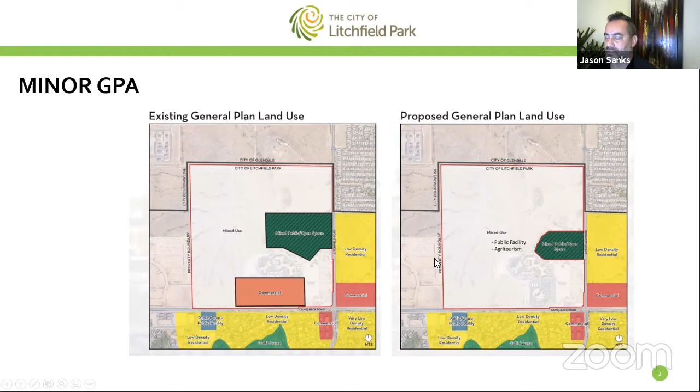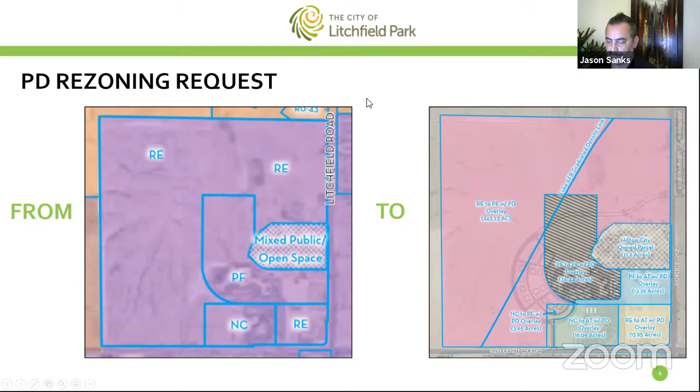So the exercise the mayor requested for the council study session in February was, okay, we see this development booklet, we see all the pictures, we get it, you're telling a story, but what is it that you actually are asking for? What would ultimately be in a rezoning ordinance when you have to put it in black and white, and what are the units? We're concerned about density. We believe density is going up, but can you tell us exactly, Jason, what it's going up to? So what we were able to do is break it down into a from and to.

You really could get up to about 770 units. That's what they have by right to develop, so long as it's done within the deed restrictions on the property, if that's the correct term in regards to the Denny Trust.

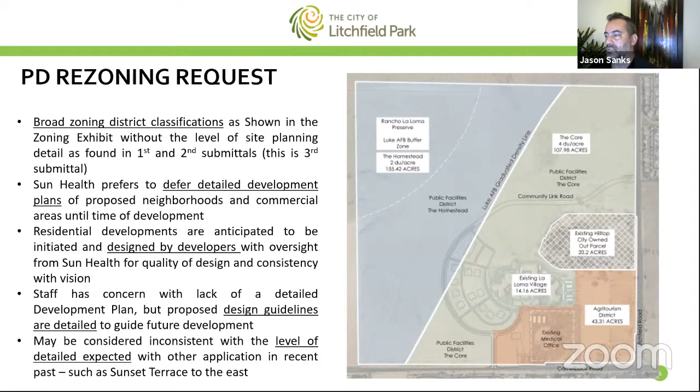So while it's inconsistent with the level of detail that's been generally expected of projects in the past, those same projects did not in turn provide the level of detail and design guidelines that Sun Health is committing to in their development plan booklet.

They have provided a graduated density and phasing exhibit. One of the issues they've encountered in bringing this project to fruition is how Luke Air Force Base and its operations, particularly concerns about residential densities and noise contours, will impact development.

So they've spent time working with Luke Air Force Base and developed this graduated density and phasing exhibit. You can see the blue section of the project with this almost arbitrarily drawn line. It's not a planning line, and it doesn't represent true phase boundaries, but rather the area where they're allowed up to 2 dwelling units per acre.

This is based on proximity to the noisy parts of Luke Air Force Base operations. So if you're wondering why this line is dashed across the large property, it represents the area restricted to 2 dwelling units per acre. Outside of that, they're proposing 4 dwelling units per acre further from the blast zone and other noise contours.

The applicant met directly with Luke Air Force Base. City staff was not, I believe, at those meetings, so I don't have further details, but they've said they have Luke's blessing regarding numbers of units, types of development, and density relative to proximity to the base. That's the first purpose of this exhibit.

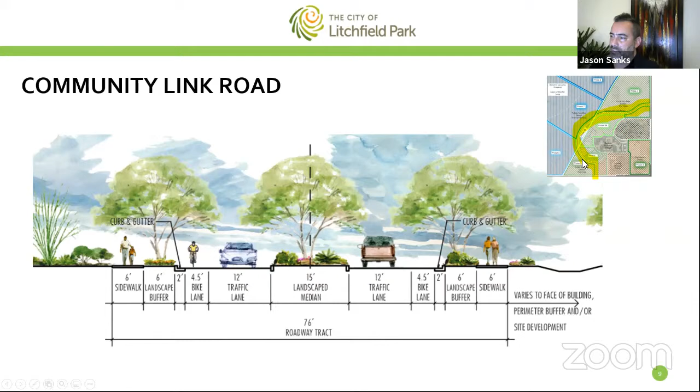Wraps the whole campus, and then extends to the... there we go. Extends to the east and then connects over to Litchfield. So that will be the spine for the whole development.

So all of the communities that are in the future to be built in and around the core, which is in the middle where the existing village is, and then the Homestead, which wraps to the northwest and then kind of to the southwest, all of those individual projects will tie into this Community Link Road, and it will be the community collector.

So the types of details they've included in the booklet that you've probably reviewed is how would we build this out, how would it be an attractive community, and what are we committed to in terms of quality and design, while at the same time meeting the infrastructure needs of the project? So these are things that Woody's been looking at.

As we progress closer to hearing dates, he'll have certainly a host of recommended conditions or stipulations that would tie them to specific improvements to the property. But I did want to show you this - this is the primary road. Within the booklet, they also show what the neighborhood streets would look like throughout the development as developers come in.

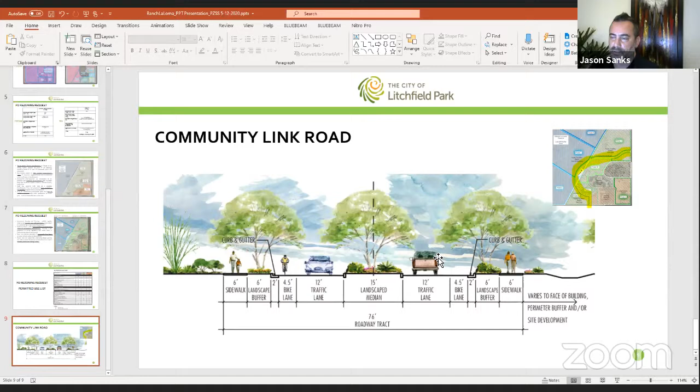So those are all of the slides I have. Again, I tried to keep focus off more of the illustrative, photographic type exhibits in the booklet, and just stick with the black and white stuff.

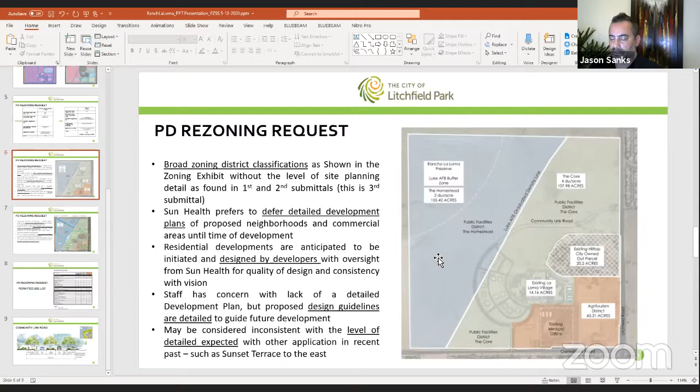It is a large rezoning case, it's a lot to digest. The big thing to remember is for them to really develop this property in the way that they want to, it does require rezoning. They are requesting an increase in density. In return for all of that, they're providing you the vision of how they believe the campus will build out, and they're committed to a significant set of design criteria to guide that future development, even though they don't have the details of that future development at this time. So that's what they're asking you to support.

With that, I'd be happy to answer questions. And then when the applicant representative is ready, I can turn the controls over to, I believe, Carolyn, and she'll present to you her version of the slideshow. Does anyone have any questions for Mr. Sanks?

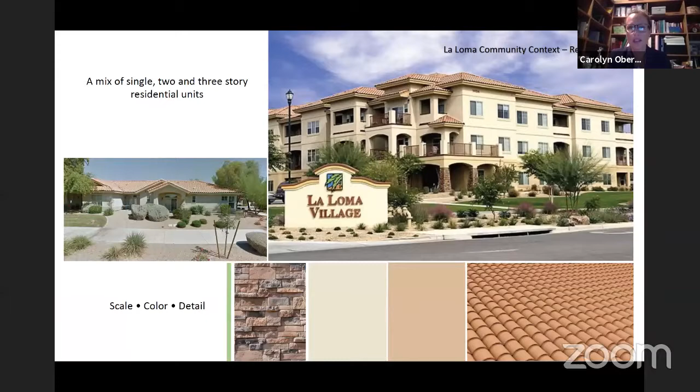We also have the medical office building, the MOB as we call it on exhibits, and that is 100% occupied right now with medical professionals that serve the larger Litchfield Park community. So that's not specific to La Loma.

I should also mention that on the La Loma campus up in the village, last year they had just short of 350 non-La Loma rehabilitation residents. So if you have a short-term rehabilitation you need to do from a knee surgery or a hip replacement, that can happen on the La Loma campus, and does frequently.

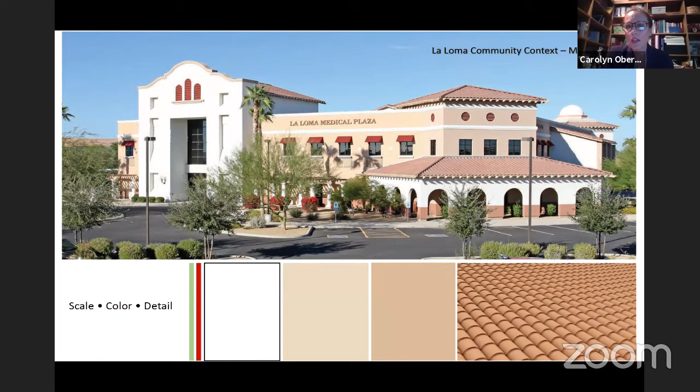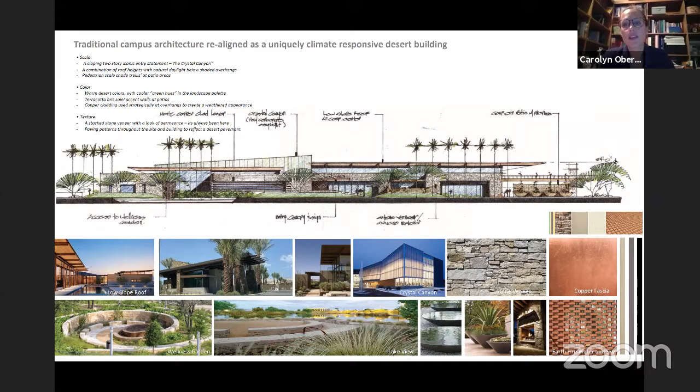So when we were before you in September, we showed you this graphic. This is the depiction of the community center just west of the medical office building. And that then evolved into these schematics, which were ultimately approved in the design review board in February.

Sun Health has bond funds ready to spend on the community center facility, which is 18,500 square feet of space. It will have an event center component that can house up to 500 people without dining, 350 with. God willing, we can all get back together and have an event so big at some point in the very near term.

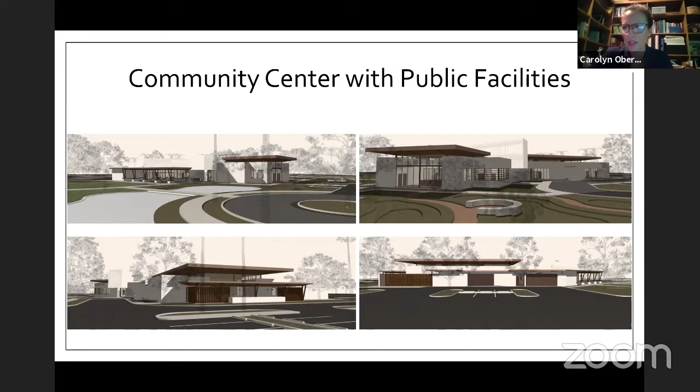But the community center is that next phase of the development, and again, was able to proceed to design review because it was not reliant on this zoning application, but permitted under the current neighborhood commercial.

And here's how it all fits together. This is a graphic that details it, and I believe you can see my arrow. So here's the medical office building, the La Loma existing village. And if you can picture the existing zoning now, it includes this as the neighborhood commercial, and then the public facilities goes to Litchfield, comes around and comes north, kind of in a loop like this.

What they're looking to do with this next phase of development is, again, include this community center, expand the collector, the main community link, what will become a major link in terms of circulation, and then extend it up and around to facilitate the development of the next phase, which would be more independent living and perhaps assisted living here. But the collector is a private road with the future connection and future signal on Camelback here, a future signal at this location, and then wrapping around to a future connection up north of the Fry's development.

The traffic study was submitted with this application, that is a part of the full application package. It does also include improvements to Camelback. Camelback will ultimately have a 70-foot half street that is constructed on the north side of the road as a part of this development, as well as improvements to the adjacent half street for Litchfield Road, I'm sorry.

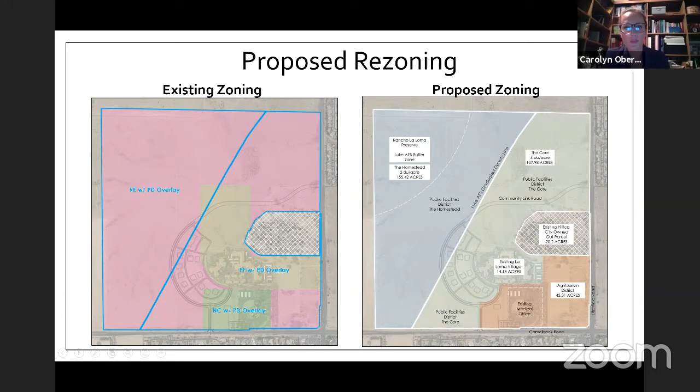Here is that same exhibit again, breaking it down on a per-district basis and how we arrive at those numbers. It does not include any calculation for La Loma Village.

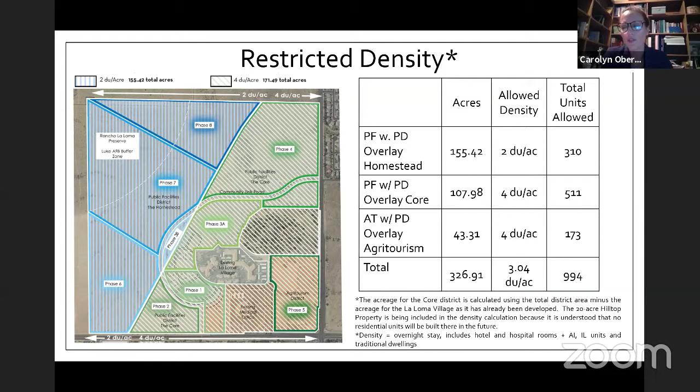That's something we've had very detailed and frequent conversations with Luke about. Because that development preceded the graduated density, it's grandfathered in, and only new development will be subject to the new graduated density preferences, which have a graduation of residential densities as you get farther from the noise lines.

The Sun Health residential products include a mixture of villa and attached units. I'm going to show you some residential concepts they'd like to move forward with in that next phase, which is a visual representation of these development standards. Also, the existing single-story attached villas currently on the campus would be facilitated by these development standards.

I'd like to touch on each of these briefly. As we go through them, if you're wondering what the source is, there's a note on the bottom of each slide showing the page reference from the zoning booklet in case you want to double check anything. For example, where my cursor is circling is page 65 from the zoning booklet, and on the bottom right, it says page 66.

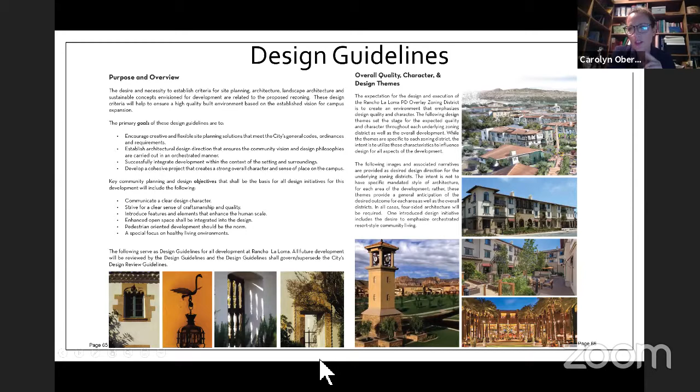There is a Santa Barbara Spanish colonial design theme that will be continued through the project, as well as principles of sustainability, plant reuse and salvage, landscaping elements, connectivity, and a Sonoran desert setting as the landscaping theme. There are also site design requirements.

The site design requirements apply to the whole and address orienting buildings so there is a connection with the street and pedestrian access is obvious. There are requirements for street scenes to have varied front yard setbacks, and a host of pedestrian linkage requirements to incorporate the various districts with one another.

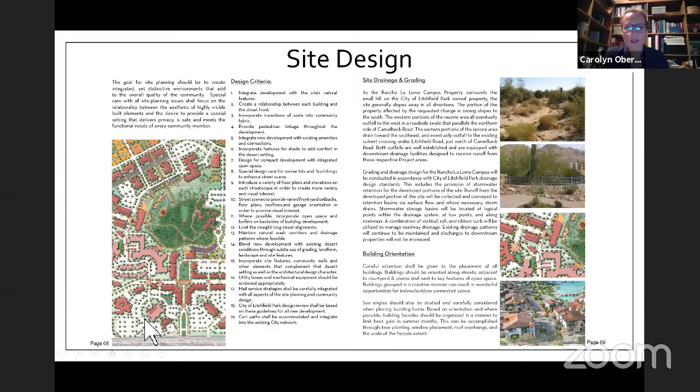These carry on, and again the page references are here, but this is applicable to the whole. Furthering the pedestrian linkage conversation, that's also represented on this page, along with very unique on-street parking requirements trying to eliminate how parking is viewed from residences and buildings. I'll show you some representations of those standards as well.

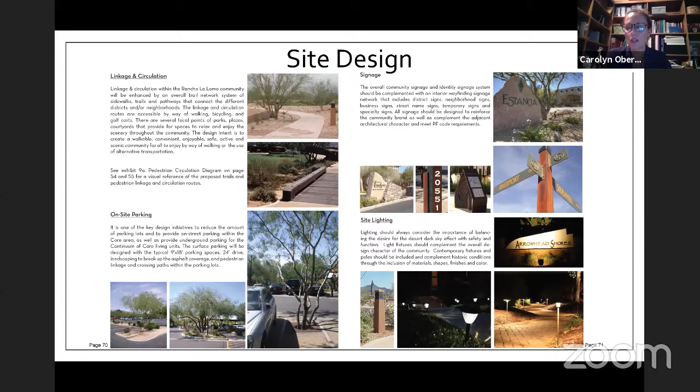There are site lighting and signage requirements that invoke a dark sky, low intensity, low intrusion lighting scheme. There are also screening requirements that establish barriers between uses, but are not meant to be visually obtrusive in terms of materials and view fencing.

The landscaping requirements include view fencing provided adjacent to open spaces. So we'll have screening from residential to non-residential uses, but where residences are adjacent to open space, view fencing is required. There are also offsets required for walls.

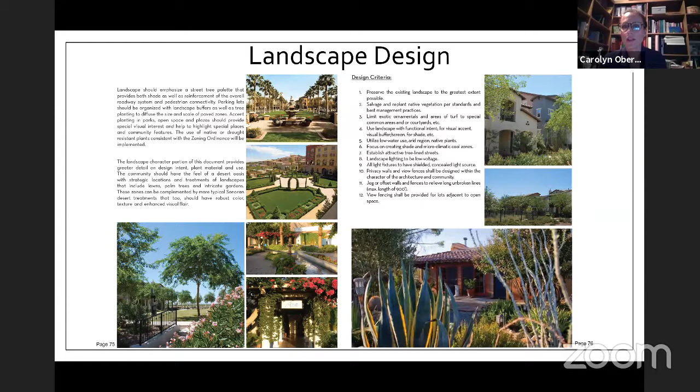There's a requirement for tree-lined streets and a landscaping scheme that seeks to salvage existing materials. There are certainly areas of the property that have a good amount of vegetation and a lot that don't. So that would be a goal for the project, to reuse what is there, but also to further a native plant palette.

So then we boil it down to the individual districts. In the Homestead district, it is very residential. Most houses will be single story, again Santa Barbara's Spanish colonial influence style, walkable with small blocks, not large expansive blocks. This is a residential specific requirement: every home has to have a porch, patio, or courtyard. That's part of the landscape theming and requirement that there be access to open space.

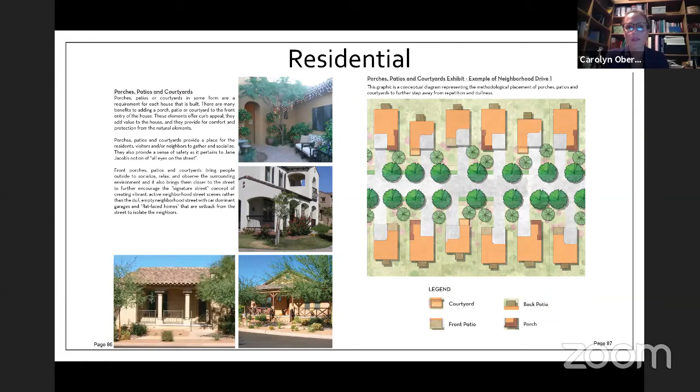The core visual intent is where you would have more density around that existing village and the connections between the existing village and the agritourism district, and the adjacent homestead. There will be more pedestrian arcades and significant corridors for inviting pedestrian experiences, but all within the context of a more dense area. Then the agritourism district is going to have more of a market style, low scale approach. The idea is that this will blend to the existing hilltop development.

There's also a discussion of preserving Aunt Mary's house, which is down on Camelback, and connecting those with a farm to fork concept. They've been working with farmers to bring a retail farm stand to fruition in this area. They intend to source a lot of the food for La Loma from these future crops at this location, so they're building relationships with farmers to secure that.

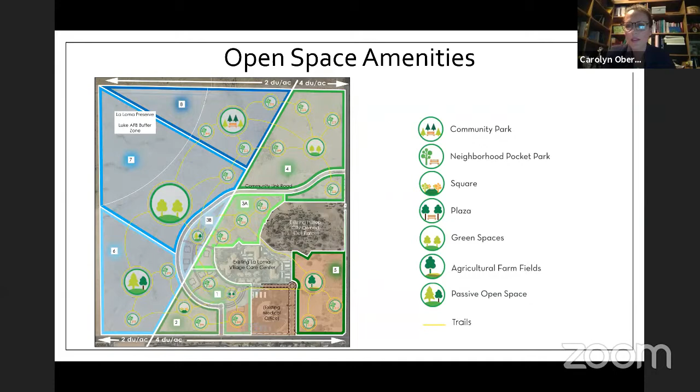The open space amenities are going to be established throughout the project. There's a hierarchy of those amenities in the book, but a requirement that with each phase of development there must be at least 15% open space as each phase develops. The code requirement is 10%.

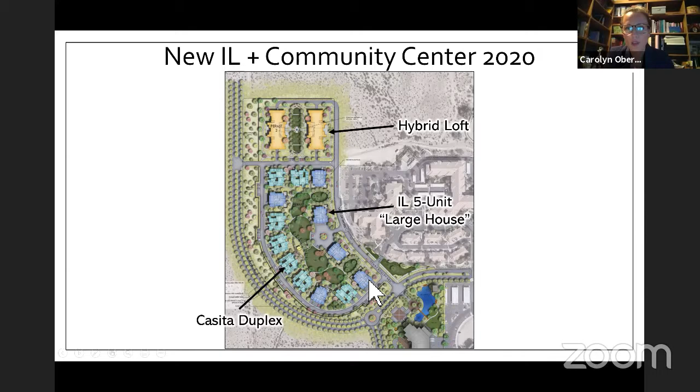You can see this representation of connection to open space in this exhibit for what will be the IL expansion area. You see the community center, the existing medical office building, and the existing La Loma Village. The concept for this is three different residential products around tree-lined streets, large open space expanses, and connectivity throughout the project. These individual concepts, the blue concepts here, are large house concepts.

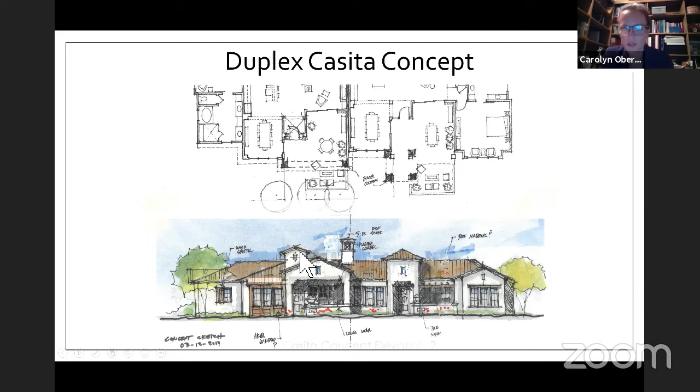You'll see that they all have the porches and courtyard elements, a reduction of garage dominance with recessed garages on the first floor. There are duplexes, which are large casitas connected by a wall, and they have individual courtyards and patios. Again, this is just a design concept to show the intent of the modernized representation of the architecture.

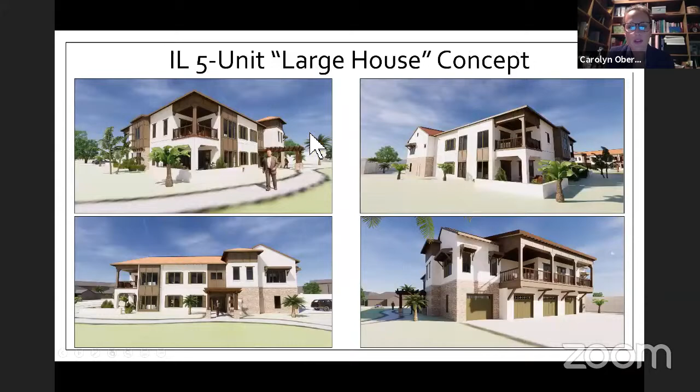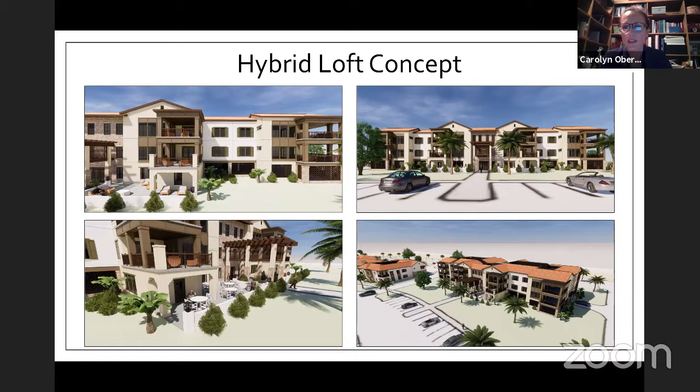And the hybrid loft concept, which is up in the northern part of that next phase, has parking for residents underneath on the first floor, tucked under, with guest parking out front. So again, accessibility is key in these units, wanting to make sure people have easy access to their vehicles, but that the architecture is not dominated by the vehicle perspective.

So why do we need this rezoning? The 52 acres that are already PF, 14 acres of which are developed, that's the center piece here. The intensity of development and how to appropriately master plan it really requires that the lines be different than where they are today. In order to take the road north, it cuts close to the hilltop, and it doesn't leave large development parcels for a full circulation plan.

It really wasn't contemplated when only 52 acres was zoned here. With the medical office building, the focus was all down to Camelback, not how there would be a full loop road and how it would all connect to an ultimate circulation system. So this rezoning package allows us to establish this framework for this master plan.

But as Jason mentioned, this will enable us to develop it incrementally over many years. As you've seen with the current project, it's been in its current state for some time. It's just gone through its redevelopment on the interior, and now they're looking at this next phase of development. So this is an incremental project, not one where a large master developer comes in all at once and carries it forward.

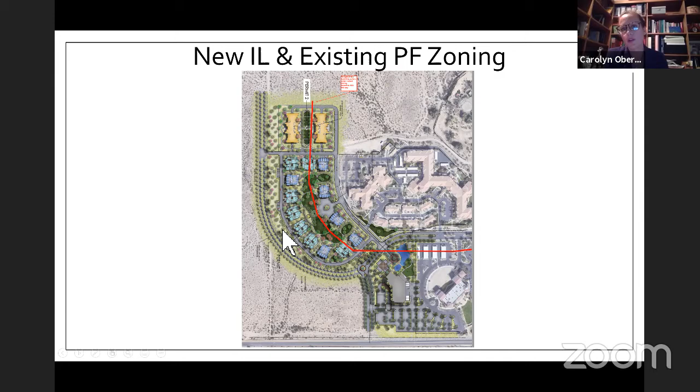This is very much driven by Sun Health, and when they have the funding to proceed with a project, they will do it. So we're not at the point where we can get into the specifics, but it makes sense to plan the larger development in terms of spine roads and maximum densities, so that the full water, sewer infrastructure necessary to serve the development is contemplated all at once and provided for. This red line is a conceptual line, not a metes and bounds legal description, but it shows about where that PF line currently goes. You'll see it captures just the front part of the residential development. So we really need this rezoning project to carry this part forward. With that, I'm happy to address any questions you have.

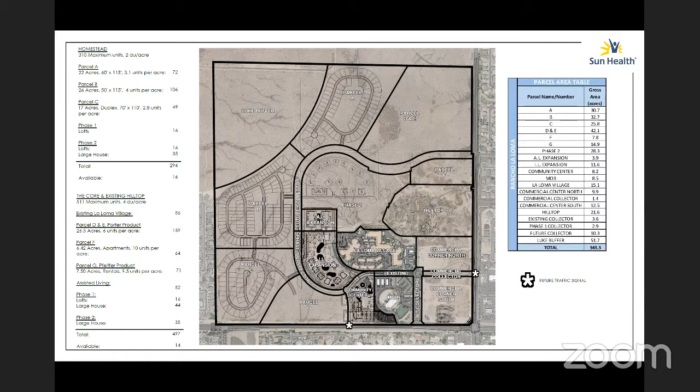One last point: I was wondering, has La Loma studied the Crossdock project, and have they taken a stand on it? Or are you considering the proposed Crossdock in your traffic mitigation? That facility is off-site. Our traffic study looks at what we're going to be generating, but in terms of participating in that process, Sun Health is concerned about the project and has weighed in with the county on it.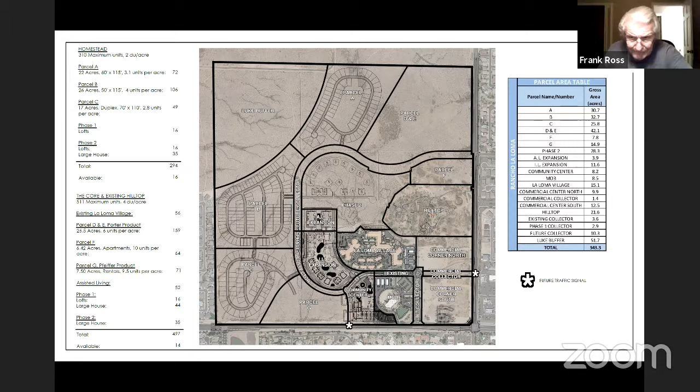If I may, Commissioner Chair and Commissioner Lawrence, just to clarify, as we collect the comments from the study session and I relay comments back to Woody Scoutten and the city engineer, your concern is ensuring that infrastructure improvements related to right-of-way, sidewalks, and signalization for the purpose of both public safety and what's currently occurring now, as well as what you believe will be further pressured by the development of these phases, and that you prefer to see as many improvements related to Camelback, Litchfield Road, and this collector as possible. Is that correct? That's correct.

Okay, great. I just want to make sure that when Woody's evaluating the request to phase these improvements, he's getting your feedback, and I'll relay that to him.

Well, I know, Jason, even having all of the cement trucks, construction vehicles, and everything else that would be involved in the development ongoing for many years, it would be mollified if you could do something for the community—if La Loma campus, or Sun Health rather, could take care of the sidewalk issue. I happen to have family that lives in the Mattamy Homes project, and going between that and trying to get to Fry's or whatever, it's extremely dangerous. There's no sidewalk on the south side of Camelback there, and there's no sidewalk on the north side.

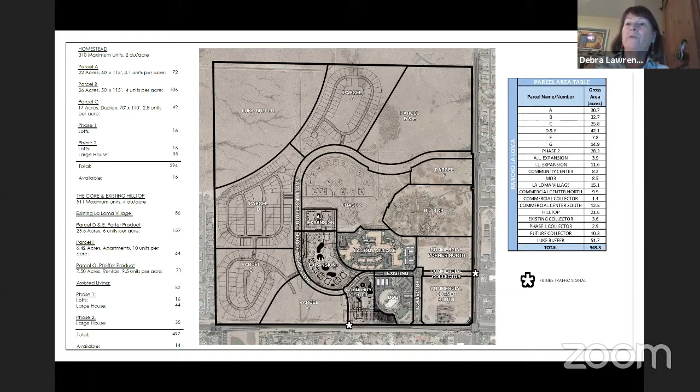And there's a patch there where cars are going 50 miles an hour or more, and it's a very dangerous stretch. Adding construction vehicles and everything else to that is concerning—I have a daughter-in-law who teaches at Dreaming Summit School, and she won't even make a left turn on Litchfield Road because of the dangerous intersection there. I think they could gain a lot of points with the community if they came in and said, 'we realize there are some challenges here, and we're going to address that right up front from a safety point of view.'

Those are my thoughts. Thank you. Anyone else?